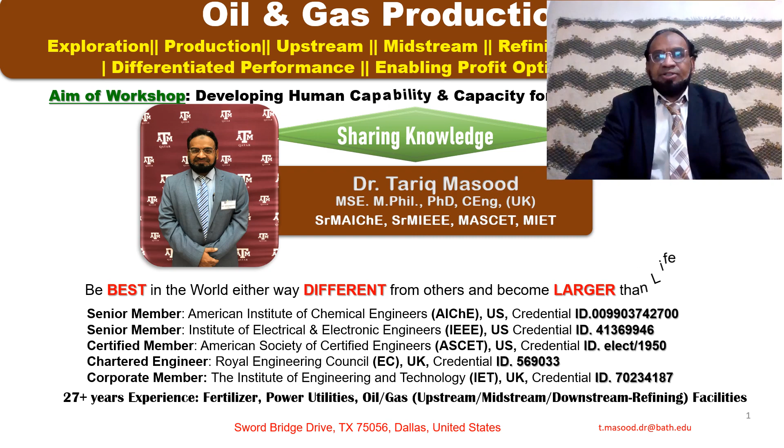This is a very important page. I pay my special gratitude to faculty members and students, Department of Chemical and Environmental Engineering at GCT and NFC Multan, Pakistan, in particular late Professor Dr. Saeed Ahmed, rest in peace, and Professor Dr. Afzal Haq, former Vice Chancellor and pioneer at NFC Multan and former VC at NED UET Karachi, and certainly Professor Dr. Tahir Imran Qureshi, the Maestro of Organic Chemistry.

Faculty members and students, Department of Petroleum and Chemical Engineering at Texas A&M University, College Station and Qatar campus; faculty members and students, Department of Chemical Engineering, Gas Processing Center and Industrial Engineering at Qatar University, Doha, Qatar; management and operation and maintenance staff members at Pak-Arab Fertilizer, CAN, NP, urea, nitric acid, ammonia, and in particular OGDC Pakistan staff at Ghotki, Sindh, Pakistan. And last but not least, I am very much indebted and pay my special gratitude to senior management, operation and maintenance staff members at Qatar Petroleum from 1997 to 2020.

With great privilege and honor, I have completed 24 years of my glorious career with Qatar Petroleum at different levels and positions.

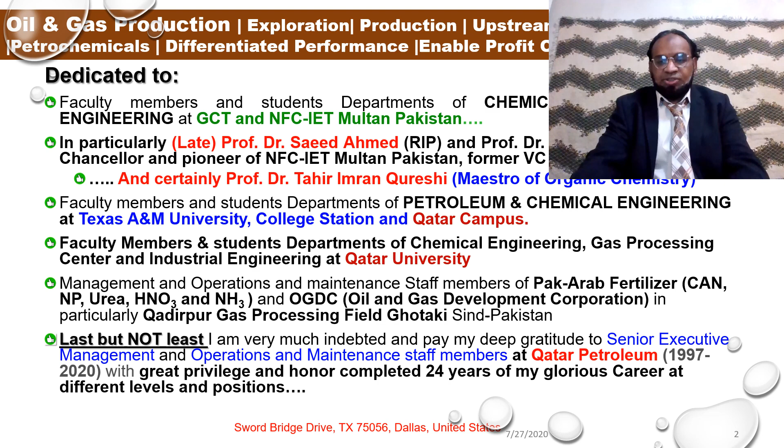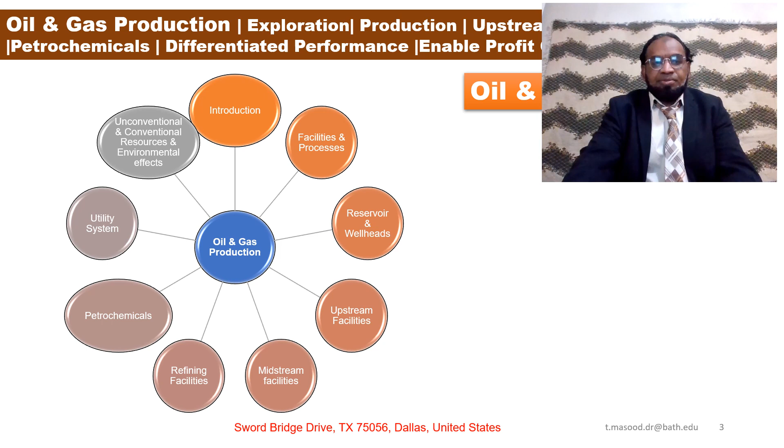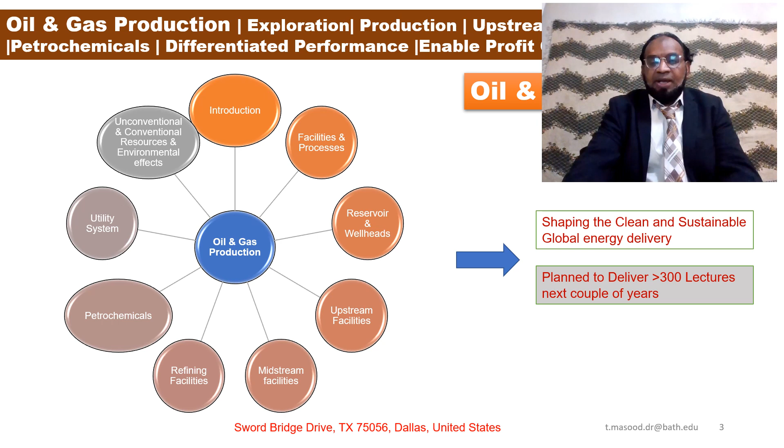This is my plan. In the next couple of years, I'm going to deliver a huge number of lectures: introductions, facilities and processes, reservoir and wellhead, upstream facilities, midstream facilities, refining, petrochemicals, utility systems, unconventional and conventional resources and environmental effects, leading toward shaping the clean and sustainable global energy delivery. My plan is to deliver more than 300 lectures over the next couple of years.

This is a very important slide which demonstrates my personal contribution. I have developed a large number of intelligent models using artificial intelligence and saved $1 million for Qatar Petroleum.

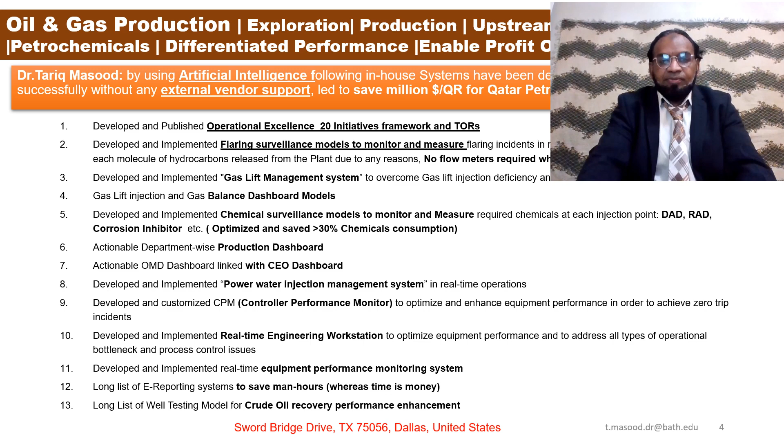Okay, midstream process sections, lecture number 6. We are going to demonstrate its different segments today, and from my next slide I will give you the key takeaway points from lecture number 6.

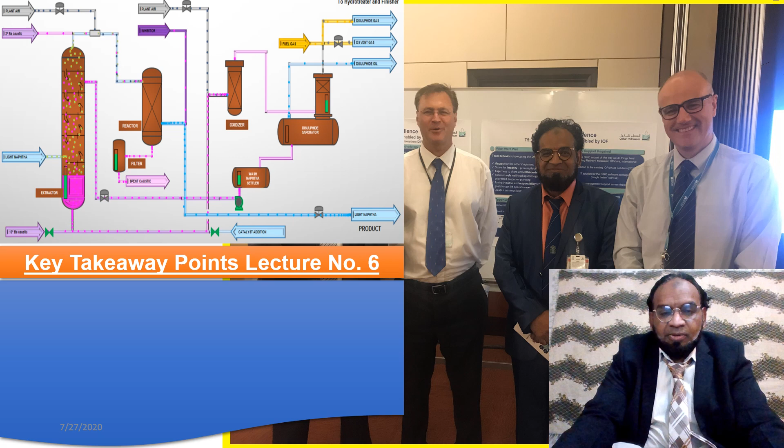Discuss midstream: gas plant processing, gas compression, pipeline operation, LNG. So these are the 5 segments: midstream, gas plant processing, gas compression, pipeline operation, and last LNG liquefaction. These 5 sections we are going to discuss today.

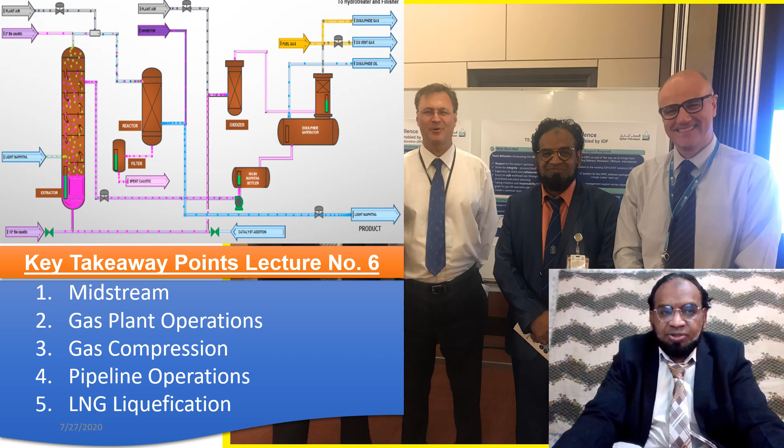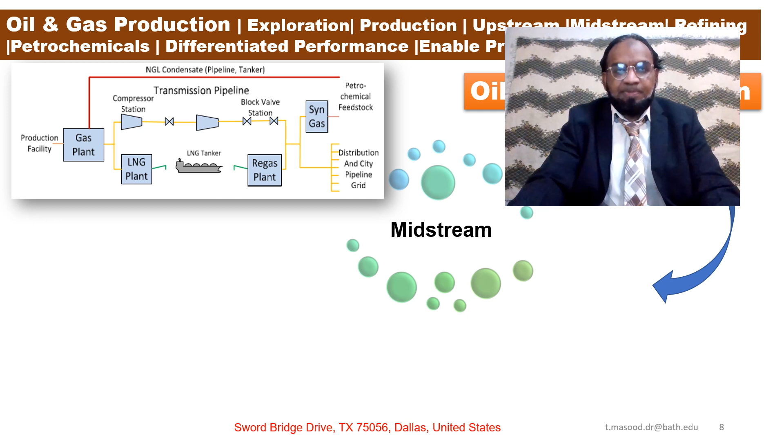Now we're going to discuss today's first section, midstream facilities. The midstream part of the value chain is often defined as gas plant, LNG production, and regasification, and oil and gas pipeline transport system. If you can see here in the schematic, we have the gas plant here, then the compression section here, then the LNG plant here, and then the regasification plant and synthesis gas, and last here the petrochemical feedstock, and this is the distribution header.

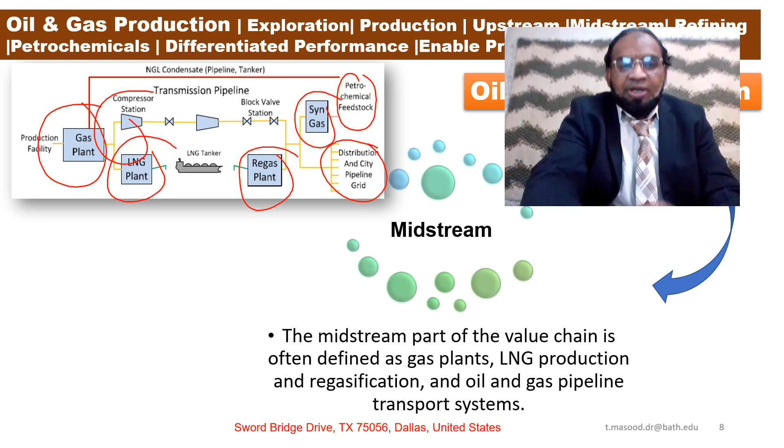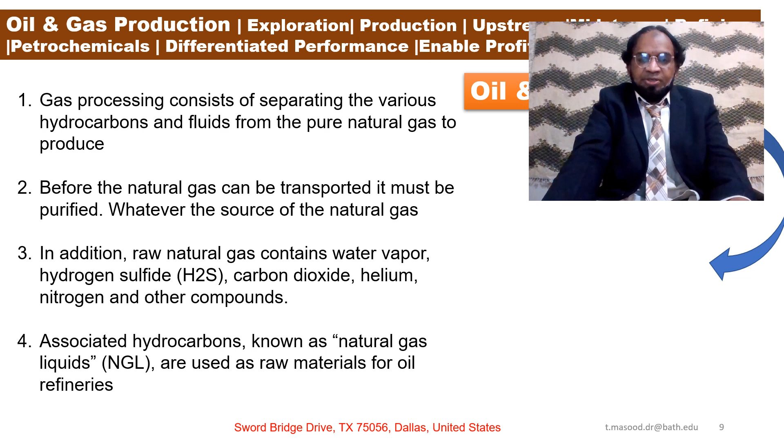Discuss oil and gas productions. First, gas plant operations, gas processing units. Natural gas can be transported. Natural gas contains water vapors, hydrogen sulfides, and associated hydrocarbons known as natural gas liquids (NGL), which are used as material for the oil refineries. Gas processing consists of separating the various hydrocarbons and fluids from the pure natural gas to produce what is known as pipeline-quality dry natural gas.

Major transportation pipelines usually impose a restriction on the makeup of natural gas allowed into the pipeline. Before natural gas can be transported, it must be purified, whatever the source of the natural gas.

Once separated from crude oil, if present, it commonly exists in mixtures with other hydrocarbons, principally ethane, propane, butane, and pentanes. In addition, raw natural gas contains water vapor, hydrogen sulfide (H2S), carbon dioxide, helium, nitrogen, and other compounds. Associated hydrocarbons, known as natural gas liquids (NGL), are used as raw material for oil refineries or petrochemical plants and as a source of energy.

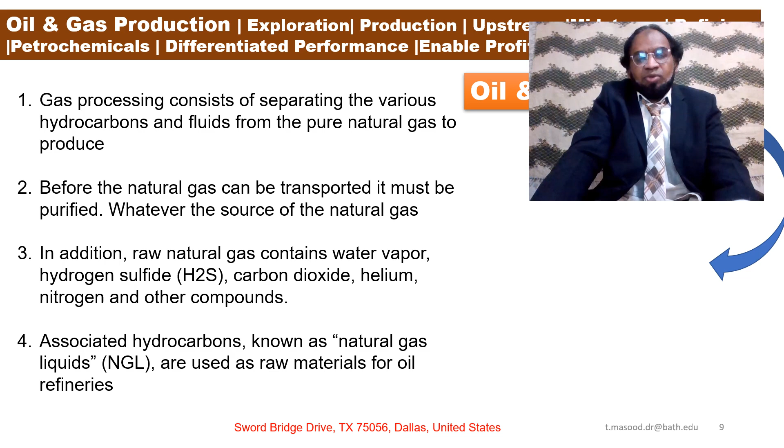Now on my next slide, we are going to discuss the gas compression section.

Gas compression sections: natural gas at sufficient pressures is recompressed and transported through various facilities. Gas from a pure natural gas wellhead might have sufficient pressure to feed directly into the pipeline, but gas from separators has generally lost so much pressure that it must be recompressed to be transported.

Turbine-driven compressors gain their energy by using a small portion of the natural gas that they compress. The gas turbine itself serves to operate a centrifugal compressor, which contains a type of fan that compresses and pumps the natural gas through the pipeline.

Some compressor stations are operated using an electric motor to turn the centrifugal compressor. This type of compression does not require the use of any natural gas from the pipeline; however, it does require a reliable source of electricity supply.

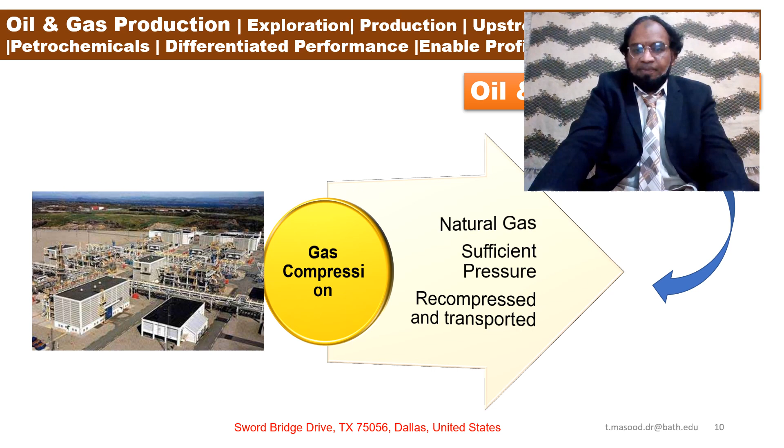The compression includes a large section of associated equipment such as scrubbers to remove liquid droplets, heat exchangers, lube treatment, etc. On my next slide, we will discuss pipeline operation.

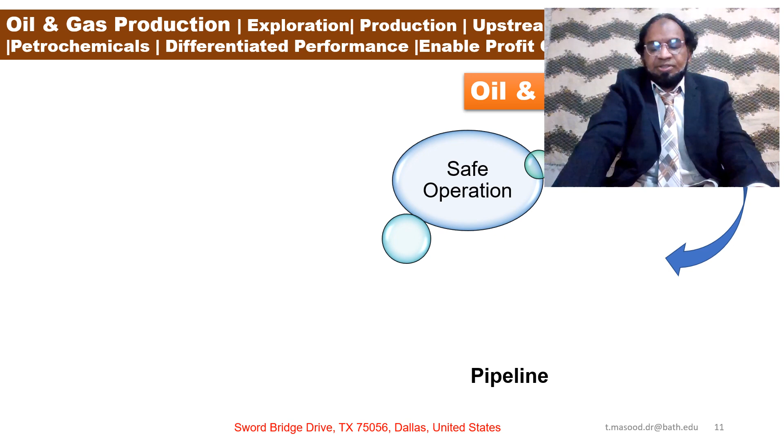Oil and gas production. First, we're going to discuss pipeline operation, section number 4: safe operation, corrosion defects, and potential safety hazards.

Pipelines can measure anywhere from 6 to 48 inches, or 15 to 120 centimeters, in diameter, in order to ensure their efficient and safe operation.

Operators routinely inspect their pipelines for corrosion and defects. This is done with sophisticated pieces of equipment known as pigs. Pigs are intelligent robotic devices that are propelled down a pipeline to evaluate the interior of the pipe.

Pigs can test pipeline thickness and roundness, check for signs of corrosion, detect minute leaks, and find any other defect along the interior of the pipeline that may either restrict the flow of gas or pose a potential safety hazard.

Sending a pig down a pipeline is fittingly known as a pigging operation. The export facility must contain equipment to safely insert and retrieve pigs from the pipeline, as well as handle depressurization, referred to as a pig launcher or pig receiver.

Loading onto tankers involves a loading system ranging from tanker jetties to sophisticated single-point mooring and loading systems that allow the tanker to dock and load the product even in bad weather.

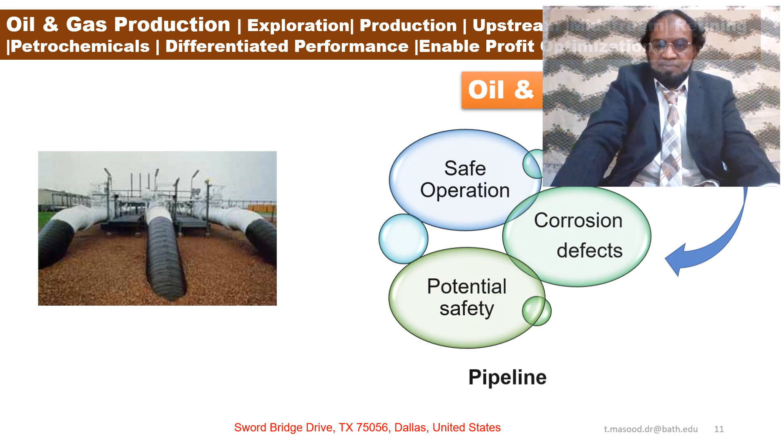Now on my next slide, we are going to discuss LNG liquefaction and regasification facilities. Oil and gas production: first, LNG liquefaction and regasification facilities. For natural gas, except for special use, the economical solution is to produce LNG.

This basically demonstrates that natural gas, which is mainly methane, cannot be compressed to form a liquid at normal ambient temperature, except for special uses such as compressed natural gas, called CNG.

The only practical solution for long-distance gas transportation, when a pipeline is not available or economical, is to produce LNG at minus 162 degrees Celsius.

This requires one or more cooling stages. The cooling process consumes 6 to 10% of the energy being transported.

Special insulation is required for LNG carrier tanks during transportation, and at the receiving end, the regasification terminal heats the LNG to vaporize it for pipeline distribution. This is very important.

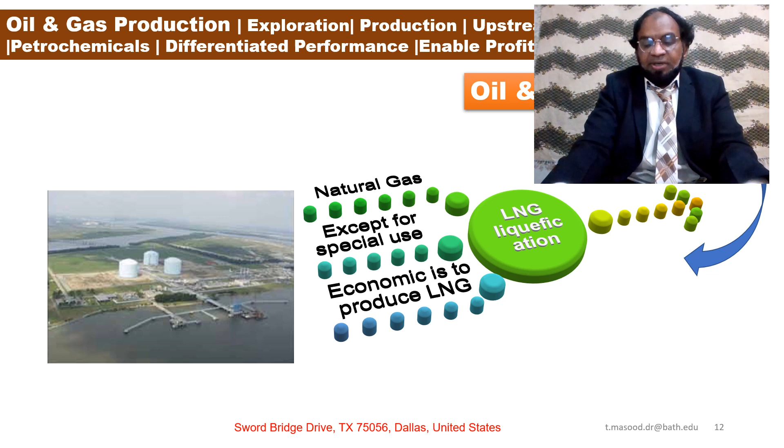So that was my last slide. From my next slide, I'm going to conclude and complete lecture number 6.

Today we discussed midstream facilities, gas plant operations, gas compression sections, pipeline operations, and LNG.

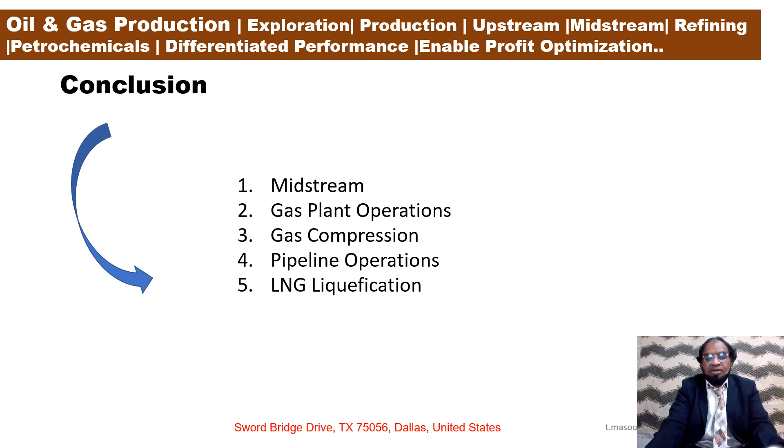In my next lecture, we are going to discuss refining and petrochemical facilities.